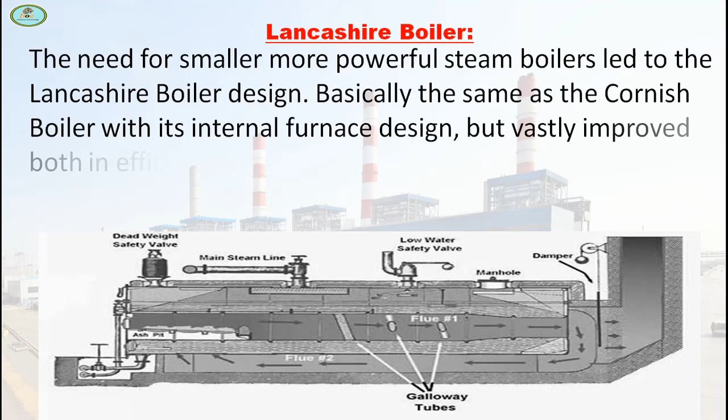The need for smaller, more powerful steam boilers led to the Lancashire boiler design. It is basically the same as the Cornish boiler with its internal furnace design, but vastly improved both in efficiency and safety.

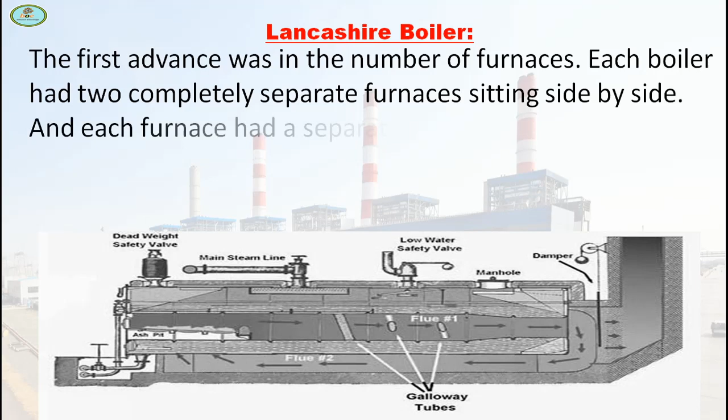The first advance was in the number of furnaces. Each boiler had two completely separate furnaces sitting side by side, and each furnace had a separate flue system.

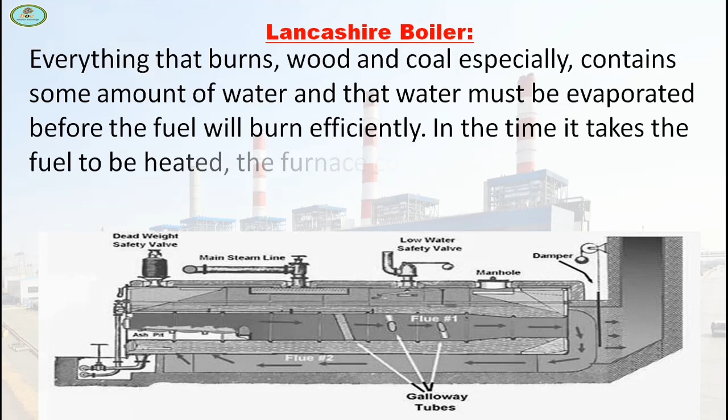Everything that burns, wood and coal especially, contains some amount of water, and that water must be evaporated before the fuel will burn efficiently. In the time it takes the fuel to be heated, the furnace cools somewhat, and that in turn lowers the amount of air being drawn into the furnace. The less air drawn in, the less heat created in the furnace.

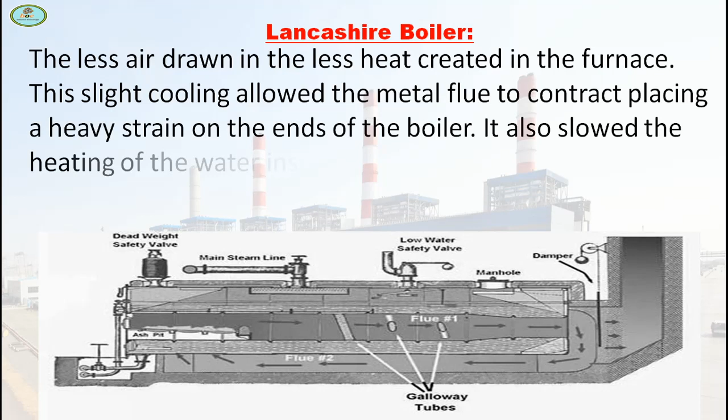This slight cooling allowed the metal flue to contract, placing a heavy strain on the ends of the boiler. It also slowed the heating of the water inside the boiler, reducing the amount of steam available.

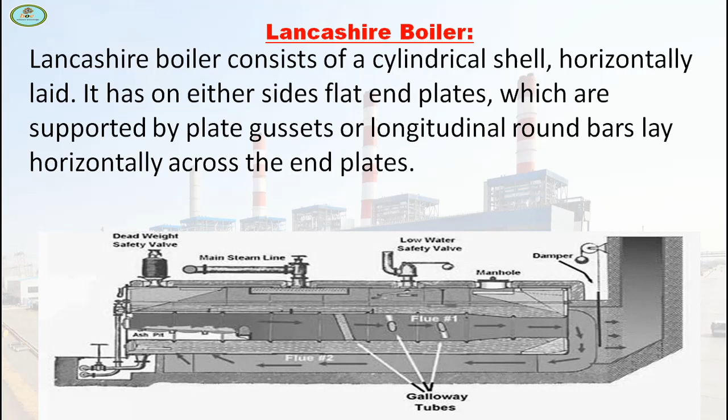The Lancashire boiler consists of a cylindrical shell, horizontally laid. It has on either side flat end plates, which are supported by plate gussets or longitudinal round bars laid horizontally across the end plates. Some Lancashire boilers have dished end plates, which do not require any type of gussets, as they themselves can hold the ends under pressure.

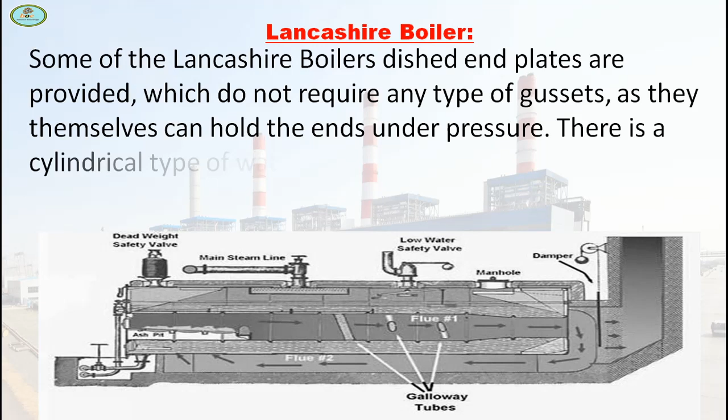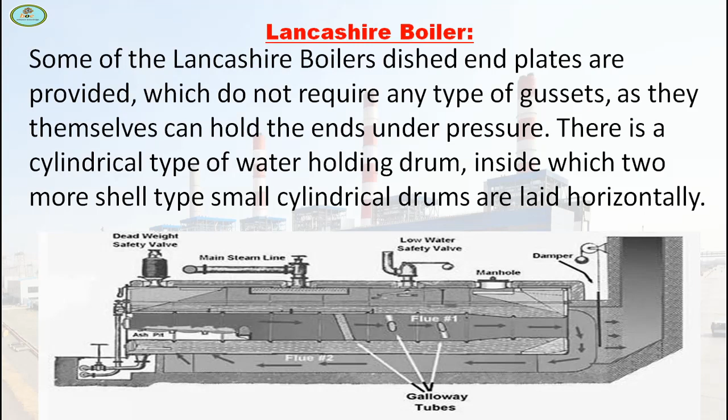There is a cylindrical water-holding drum, inside which two more small cylindrical drums are laid horizontally. The fuel is burned over fire grates at the front end of these cylindrical shells.

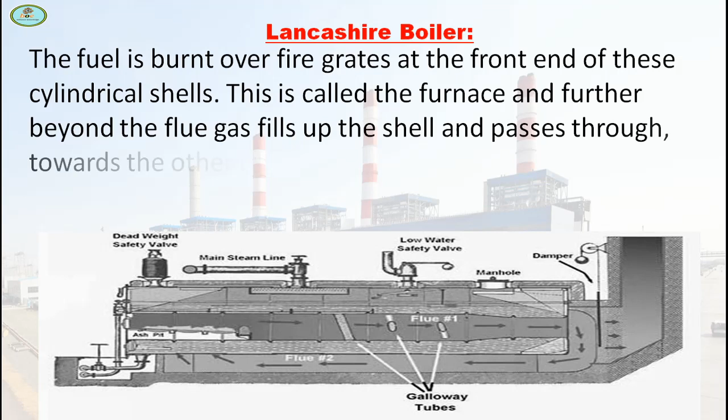This is called the furnace, and further beyond, the flue gas fills up the shell and passes through towards the other end before escaping into the atmosphere through the chimney.

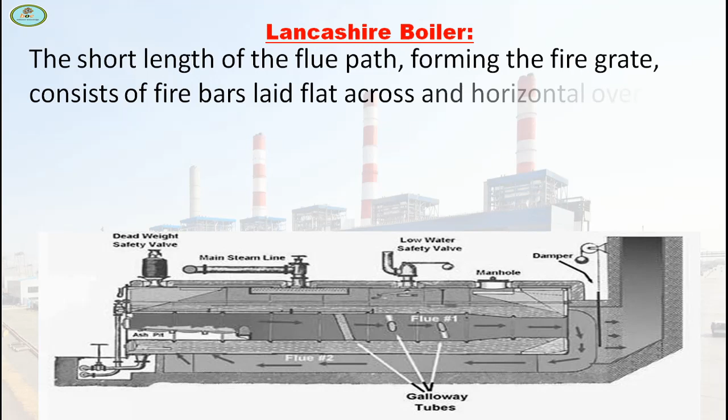The short length of the flue path forming the fire grate consists of fire bars laid flat across and horizontal over supporting cleats. Fire bricks are lined over the wall called the bridge, which diverts the hot gases arising out of the fuel combustion taking place over the grates in the furnace.

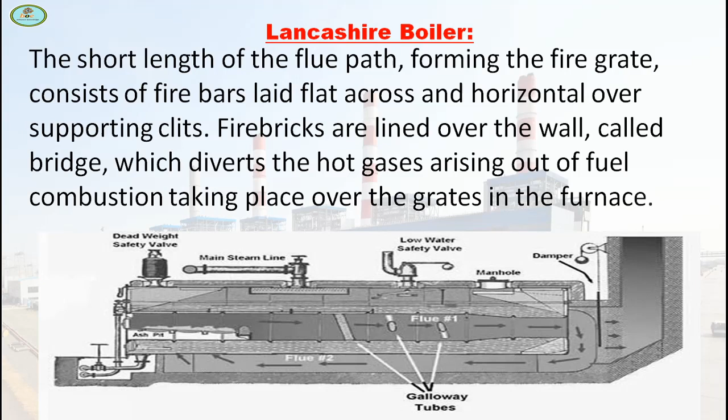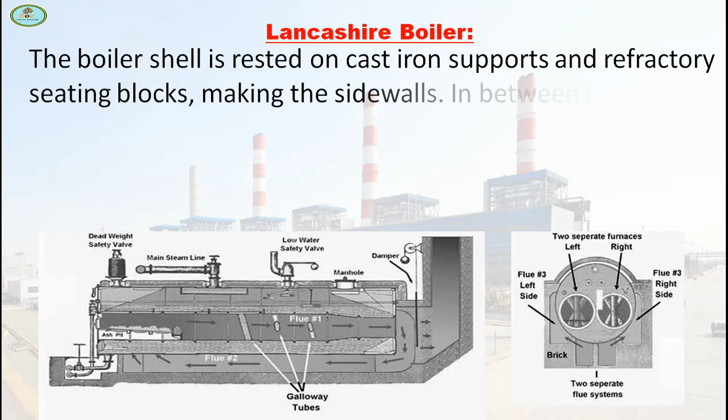The boiler shell is rested on cast iron supports and refractory seating blocks, making the side walls. In between these side walls and the shell, side flues are formed to direct the hot gases, giving additional heating surface to the boiler.

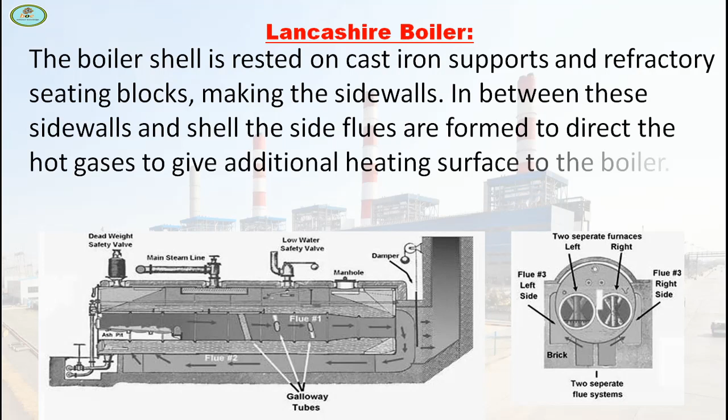In this type of boiler, a vertical superheater of Sugdens type is provided between the rear end plate and rear brick wall of the boiler.

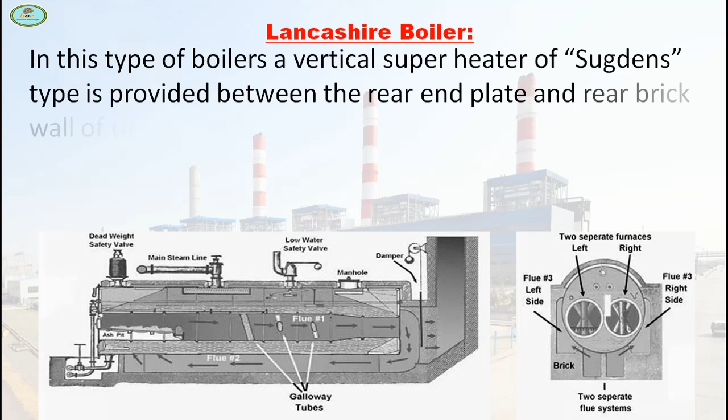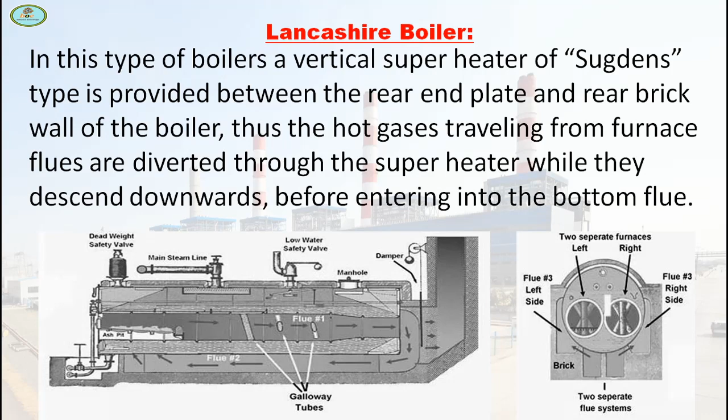Thus, the hot gases traveling from the furnace flues are diverted through the superheater while they descend downwards before entering the bottom flue. There is a manhole provided on top of the shell and a mud hole on the front end below the flues at the 6 o'clock position.

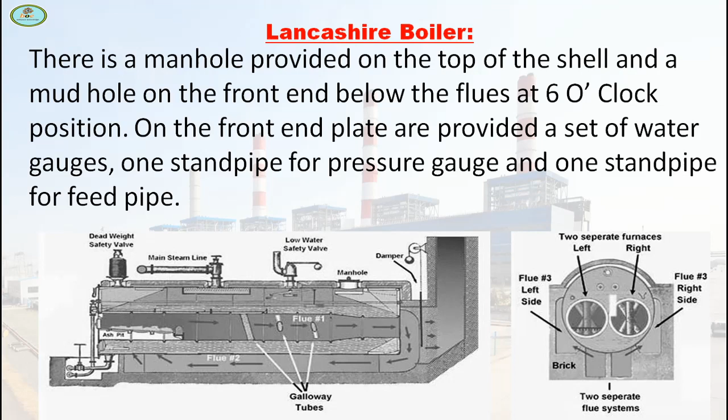On the front end plate are provided a set of water gauges, one standpipe for the pressure gauge, and one standpipe for feed pipe. These boilers are sturdy and strong in construction.

There is ample space provided around the flues and below the flues for manual cleaning in the boiler shell, and for this reason even low quality feed water can be used in this boiler.

The vertical cross tube boiler will be described in detail in the next video.